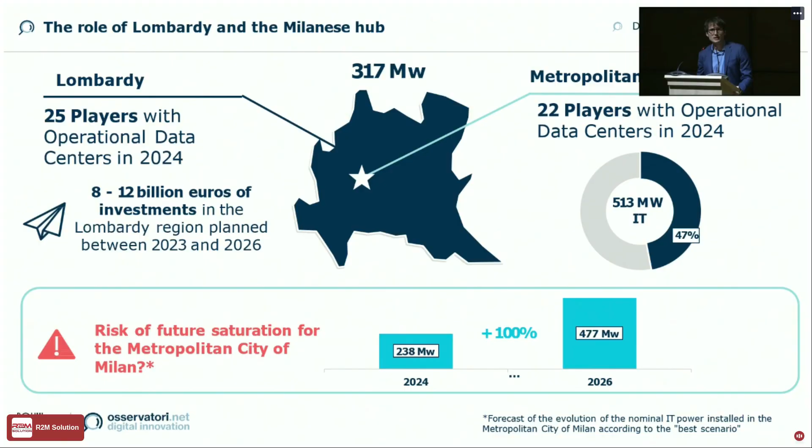In Lombardy, we estimate that we collected from 8 to 12 billion euros in the 4 years from 23 to 26, and now we have about 47% of all the data centers in Italy. We expect to double the amount of data centers in just 2 years, because by the end of 26 we expect to reach 480 megawatts installed.

It's a very good moment for the development of the market, and to play an important role not just for Italy but for the European market in general, because the European market was usually developed in the 5 most important markets, the FLAPD markets. But in the last couple of years they've had a slowdown in investment development. This situation creates an opportunity for the Nordic countries, also due to the climate conditions, since it's easier to manage temperature issues connected to data centers, but also for the South European markets like Spain, and of course Italy.

So it's very important to create a good environment for investment, because we could play a role as one of the most important computing centers, not just for our country but for the whole European market. So I think I've given you a little overview of this market. I hope it was interesting.

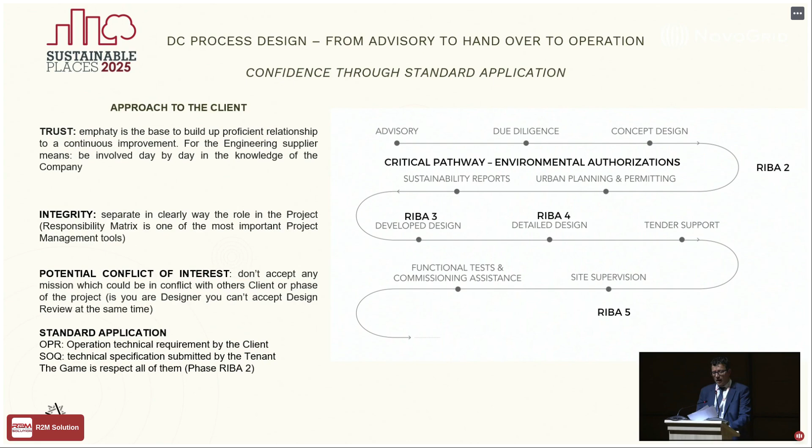So if we wanted to go through this conversation, the critical points start from a different system to measure the key factors in a data center that are totally different from logistics. Logistics measure the efficiency on the square meters, and also the value of the asset, of the land, is measured on that. But it's not the same for data center.

Data centers have as a fundamental key point how many megawatts can deliver for IT, and the capability for the asset to receive the electricity power. So when you are doing a test fit, in all the process that you have to follow during the due diligence, the first request is how many megawatts we can deliver in the asset.

What is one of the most important key points for efficiency is the PUE. The PUE is a very simple indicator that measures the total facility power on the IT equipment power. That means that if 100% is the need for IT, a PUE of 1.5 means that you need 50% more to ensure the operation of a data center.

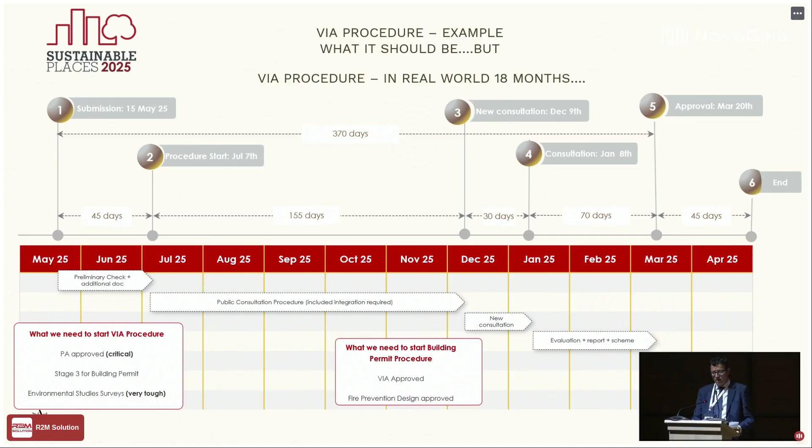Take only 2 minutes about the design process and the learning curve that we have during the design phase. Usually for DC field, we use the RIBA process. This is a protocol defined by an English institution, and they develop the RIBA in 7 different stages.

But what we need to focus our discussion on is only the first 5. This slide means the first stage is related to the advisory, and usually we take the RIBA till RIBA 1. At the end of RIBA 1, we have a test fit, which is an exercise that tries to fix in a geometrical way the capability of the plot, but it's not already investigated for the next stage. That means environmental, for example.

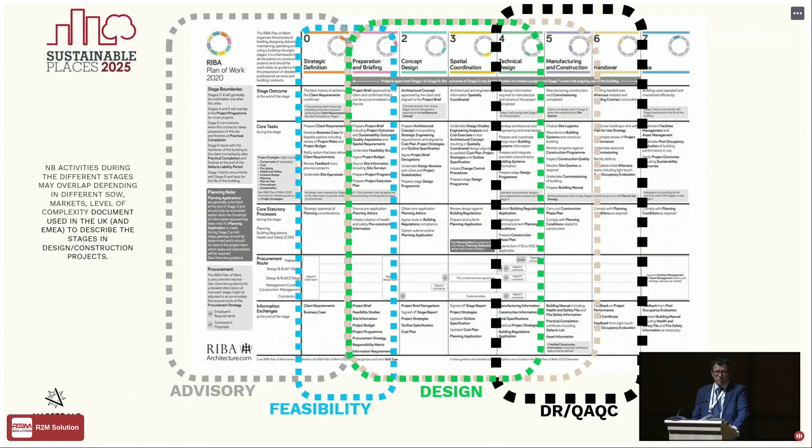The critical point is totally on the second stage, where you have to totally complete your survey. You have to be sure that you can go on and proceed on the building permit. Then, after the third stage, which is usually our definitive stage in the Italian protocol, we can launch the building permit application and also investigate the market with the contractor, not in a tendering definitive way, because we need stage 4, but we can collect all the offers.

This slide can give you an example of the learning curve. I only wanted to put a curiosity to all of you. Usually in Italian, when you talk about maintenance, it's something we put on the right side at the end, as a weight. It's totally different for DC. The plant replacement strategy is one of the most important parts of the total design process, and we need to implement it in stage 2. If it's not possible to remove something from the plot, as for example a transformer or genset, it's not correct to go on with the project.

What happens after the design phase? The engineering company can also be involved in QA/QC and design review. These are two different things. Design review is when the client asks a third party to go deep into the project and try to identify room for value engineering. And QA/QC is instead a process of quality and control.

Usually when you play in other countries, you don't have the clerk of works, but for example in Switzerland, you do, and you need a QA/QC. This is the point I described to you before about the potential situation where integrity of the professional is needed, because QA/QC and design review are not possible to cover with the people who developed the engineering.

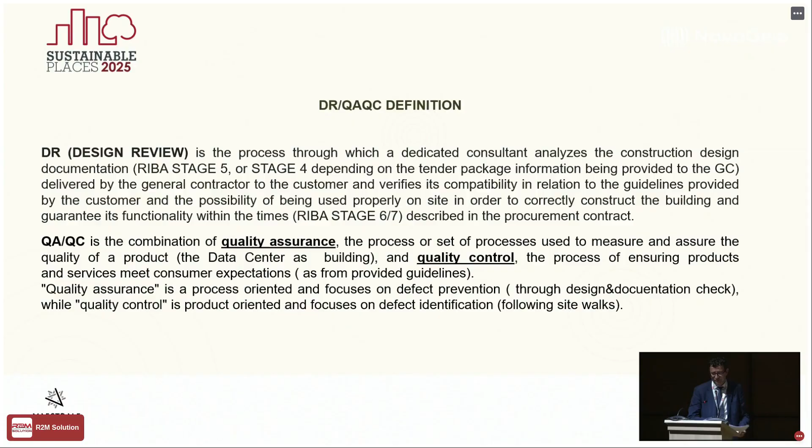Thank you, Gianluca, thank you so much for showing us. Maybe there were some additional slides in the deck, but I think it was a very good introduction and anticipation for the next speaker and topic we'll address now. You mentioned that data centers are not logistics, but also introduced the idea that there are many different stakeholders involved in this long life cycle. So Mattia Mariani will now tell us more about key performance indicators and the different stakeholders and what interests they bring into data centers.

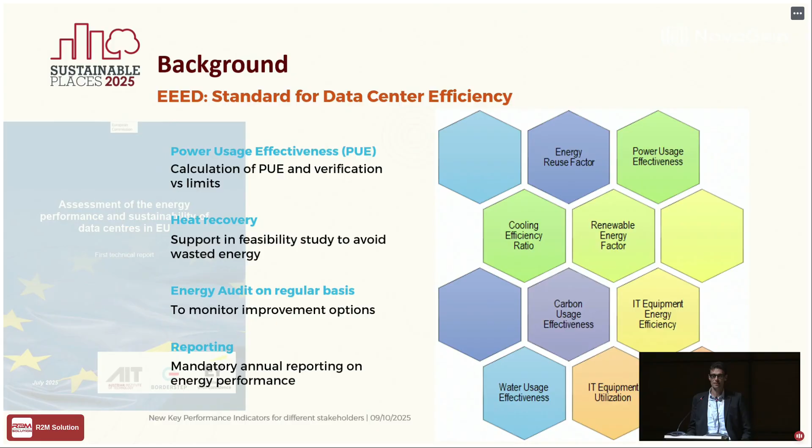Just in the picture, on the left side, you can see the first report of data collected by the European Union about data centers. It's something you can access from the web, and you can find some interesting results about the data center market.

The other topic, which comes in a more local way, is the request we have as consultants in the data center market coming from the public authority. After an initial period where the data center was not really understood by the municipality or the Italian authority, we now have in Italy also some indications from them.

When you present documentation, for example the VIA or AIA documentation, you receive some comments. I don't want to tell you a lot about the administrative process, since that's not my area - my background is on sustainability, so it's not my preferred topic. But I take from this process the requirements, and there is something interesting.

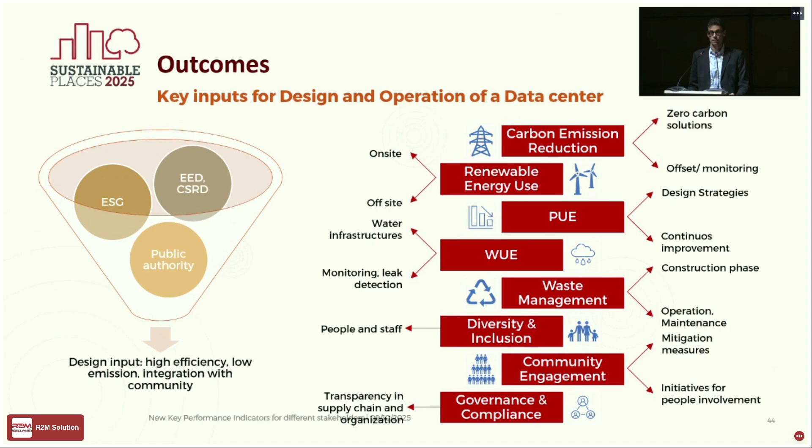So having communication and transparency in the data center is really, really important for the sustainability of the data center.

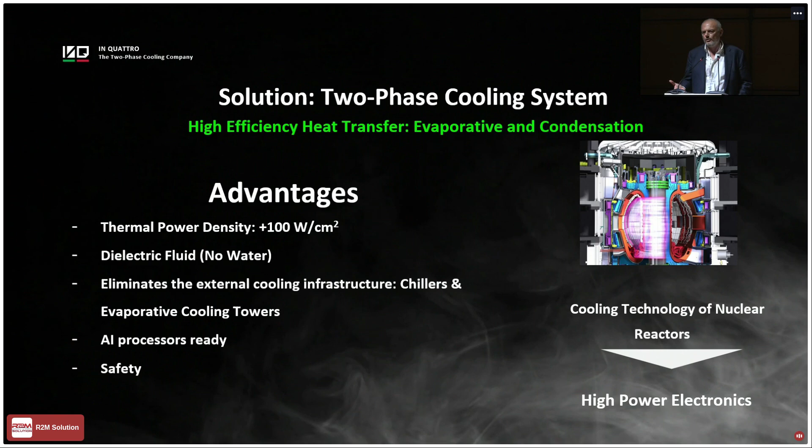So these are the main advantages of this technology. What is the origin of this technology? We didn't invent anything actually. This technology has been developed over the last 60, 70 years for nuclear reactors, but of course at large dimensions, large geometries. What has been done during the last 30 years of research around the world is to reduce the dimension of these systems down to the size of electronic components in order to cool them. These components are generally related to high power electronics.

So what is possible to do with this technology? The PUE, power usage effectiveness, can be reduced from a range of 1.5 to 2.5 for a traditional cooling system—this depends on the technology used in the data center and the quality of the cooling system—down to a theoretical limit of 1.05, typically between 1.05 and 1.2. This range depends strongly on the configuration of the data center.

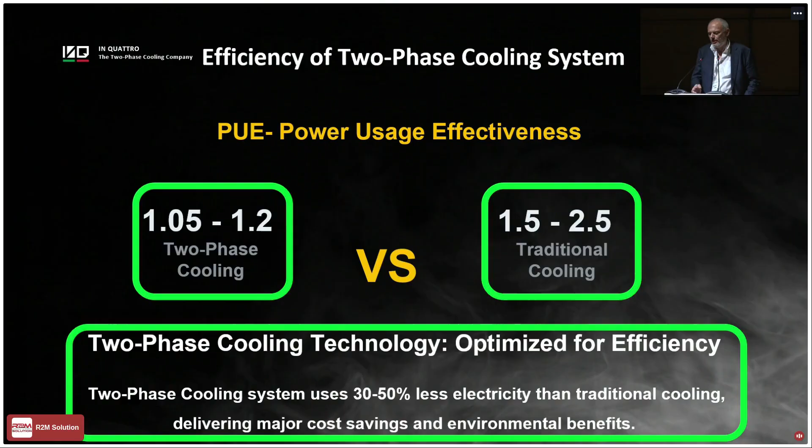Just to give you an idea, if you put an external heat exchanger called a dry cooler—a system that is not a chiller and doesn't use water—you release the heat generated in the processor outside with this system. If you place this at 30 meters distance from the data center, the PUE is about 1.07. This shows how important the design and configuration of the data center are for this particular KPI. With two-phase cooling systems, it's possible to reduce electricity consumption compared to standard cooling technologies by between 30 and 50%.

The other important parameter is water usage effectiveness. As I told you, it's possible to reduce this to zero with two-phase cooling. We have here a comparison of this parameter with other technologies. I should note this comparison is not easy to do, because it's not easy to calculate exactly the water consumption—not only the water consumption of the data center itself, but you also have to consider the water consumption for generating the electrical power for the data center.

So it's a very complex calculation. In any case, it's possible to reduce this down to zero, because with this technology it's possible to cool the GPUs and the CPUs with external temperatures of 45 Celsius degrees.

This is an important limit. Normally, with liquid cooling, you can cool the data center with an external temperature of about 35 Celsius degrees. If this temperature is higher, then you need to use evaporative cooling towers, and these components are the ones that consume water. Evaporative means that water is used to reduce the external temperature of air from 45 Celsius degrees down to 35 Celsius degrees.

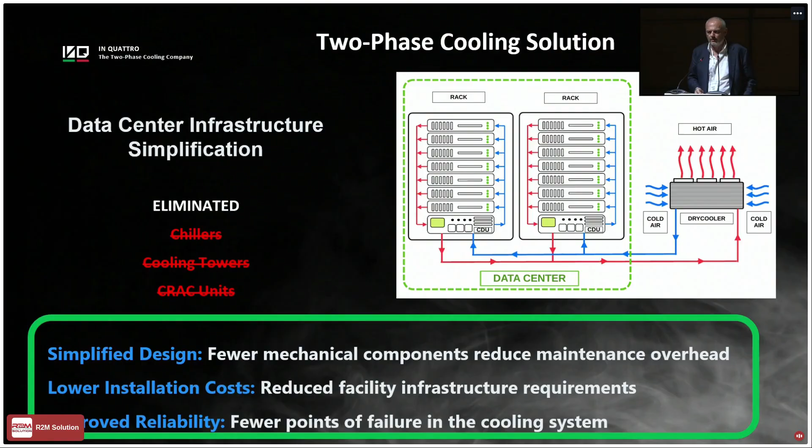We also use aluminum as a material and not copper. This decreases the cost and also the mass of the system. It also reduces the cost of manufacturing, because aluminum is much easier to work with.

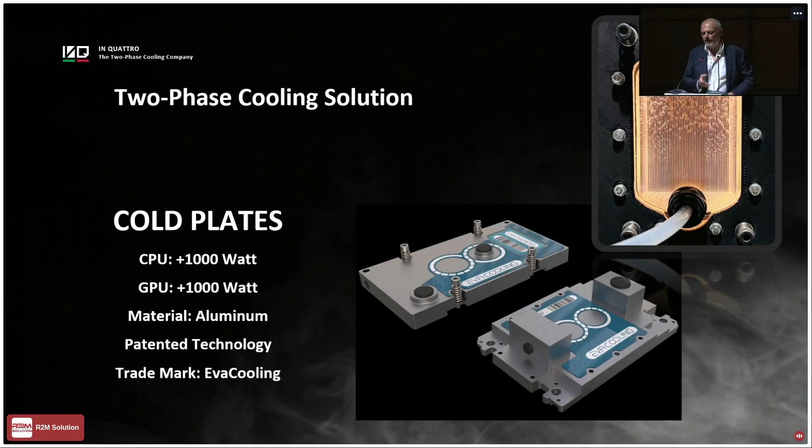And you can see the evaporation that occurs inside. These are the other components of the two-phase cooling system, and these components are quite standard. There is a CDU, a coolant distribution unit, and a manifold that distributes and collects the fluids in the servers.

And yes, it's possible - we develop these cold plates for this family of processors: Xeon, NVIDIA GPU H100 and GB200. And we expect to deliver our solution in January next year.

So who we are? In Quattro is, as I told you, a startup, an Italian startup. Actually, it's a spin-off of Enea. Enea is one of the largest research centers in Italy. The co-founders are researchers of Enea, and we developed this technology over the last 20, 25 years for space applications with a European Space Agency funded project.

So at the beginning, we developed this technology for space, and we performed several parabolic flights and tested this technology in microgravity and hypergravity conditions. And a few years ago, we had the crazy idea to create this company, with the idea to use this technology also for terrestrial applications.

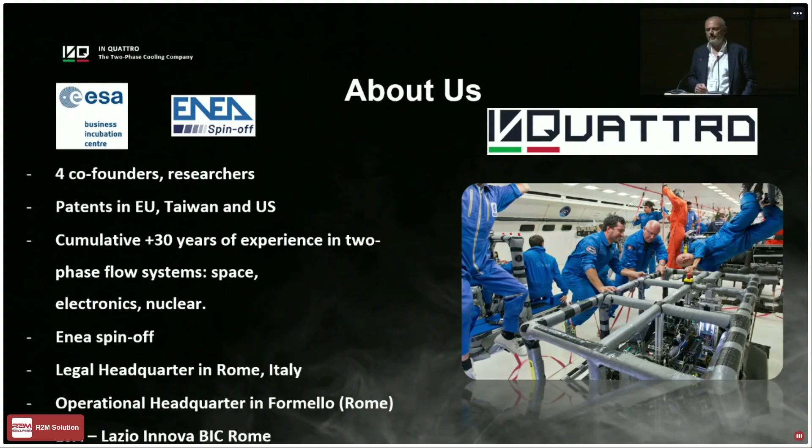So this is the team. At the moment, we are about 12 people, and in the future we are raising a funding round, so we will increase this number of people.

Thank you for your attention, and I just want to mention that In Quattro is the company, and sometimes you can see EvaCooling — EvaCooling is our trademark for our technology. So thank you.

Thank you so much, a very interesting journey into energy optimization. Congratulations also for this interesting company and for bringing up the evidence that there is transferability across technical domains — really interdisciplinarity can help advance sustainability in the sector.

And now Alessandro Piccinini will tell us something about the applications of digital twins to support decarbonization. Thanks. Thank you for the introduction.

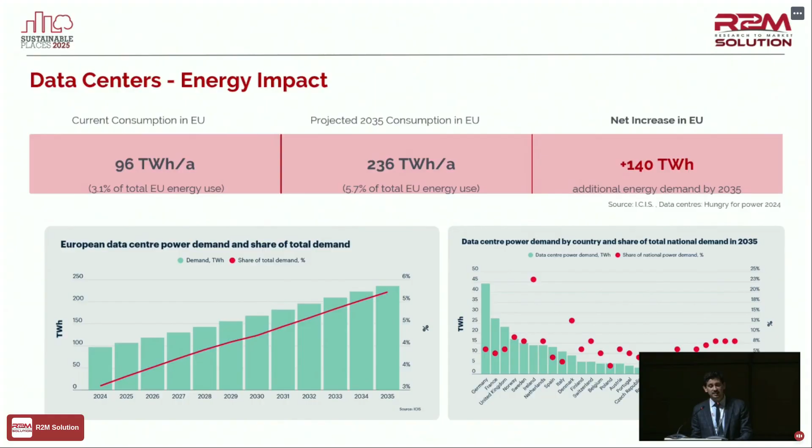Good afternoon everyone. Before starting with the presentation of the R2M digital twin solution to support decarbonization processes, I prepared a quick introduction regarding the energy impact of data centers in the coming years. Currently, data centers are consuming around 96 terawatt-hours per year, and by 2035 it's expected to increase by 140 terawatt-hours. This is a huge increase.

But since it's always difficult to understand these big numbers, I prepared a comparison with the new EPBD4 challenge — one of the main arguments that R2M addresses. Basically, the new EPBD gives some targets for residential and non-residential buildings. For non-residential buildings we have two main targets: one for 2030, with the main scope to renovate 16% of the worst performing buildings, and a second target, also around 2033, to renovate 26% of the worst performing buildings.

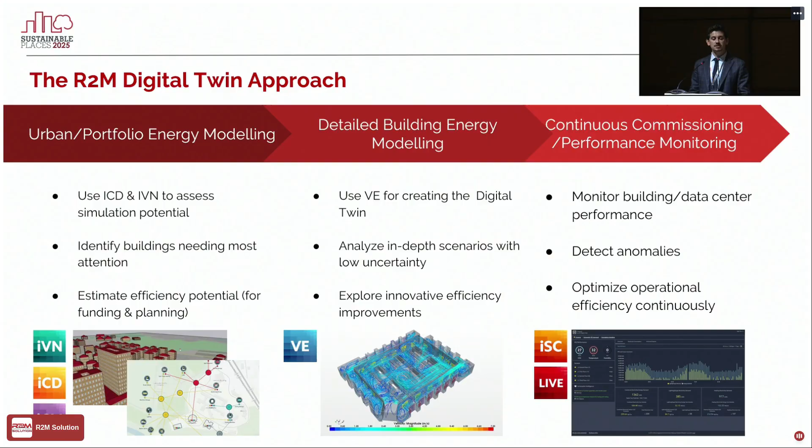And finally, a new path is continuous commissioning and performance monitoring. Here the scope is to utilize the detailed model to detect anomalies in the real building — so to do monitoring, but not just monitoring, also reusing the detailed energy model to assess and perform fault detection and diagnosis in buildings and data centers.

So with this scope, in order to present our digital twin approach, I'm going to present a series of case studies, hoping they'll be interesting.

And just to mention, from the grid, we were able also to recover some of the waste heat from a data center. And thanks to the recovery of this heat, we were able to have a very good return of investment from the district heating and cooling grid.

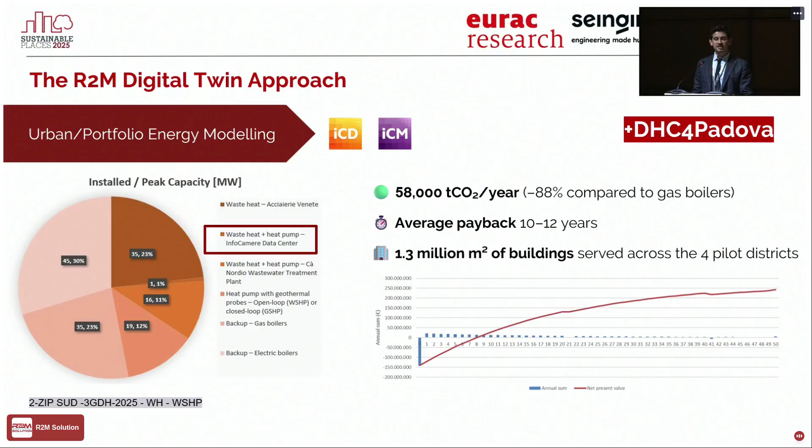So it's very important to do this kind of urban level analysis to understand how much we can recover from this data center and how much we can give to the buildings in order to improve the efficiency of the data center, but also to improve the efficiency of the buildings that are near the main cities in Europe. So this is another point of view with the model we did at urban level.

What we can also do is an EPBD analysis in which we can underline which buildings at urban level need to be renovated under the new EPBD.

So then the second level of detail is the detailed building energy modeling. In this case, the scope is not to model the whole municipality or district, but to model the single building. Here I'm presenting a small data center, but a real data center, of the European Space Agency in Madrid, where we helped the design team to improve the efficiency of the building by providing innovative solutions in the data center area.

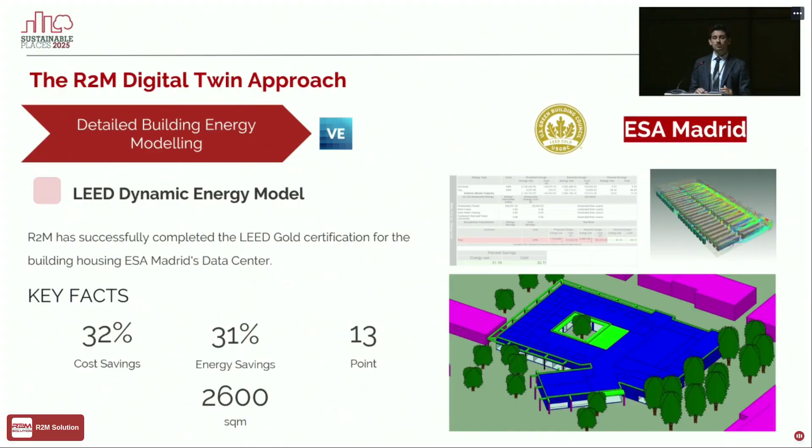And thanks to this innovative solution, we were able to reduce consumption by 31% compared to the baseline building of LEED, and we got the gold certification. So the scope of this work was not just to get the LEED plaque, but to follow the design team in reaching the best energy efficiency for the building.

Another case study, this one from the IES team, again made with IES, the detailed energy modeling software. In this case, the scope was to study the ventilation system of the Central Bank of Oman data center. Here you can see we utilized CFD analysis and did detailed study of the ventilation in order to improve the ventilation system inside the data center.

So the only problem right now with these detailed models in general is that basically, after this kind of analysis, they are usually not used. They go in a bin. So the scope of these two platforms, iSCan and IES Live, is to reuse this kind of model.

For doing anomaly detection, fault detection and diagnosis, for monitoring. So what we do here is use the platform IES Live, in which we can monitor all the performances of the data center. But what we can also do is compare the performances of the data center with the digital twin that we made with IES. And by comparing the real consumption with the simulated consumption, we can detect anomalies, we can simulate energy efficiency scenarios and things like that.

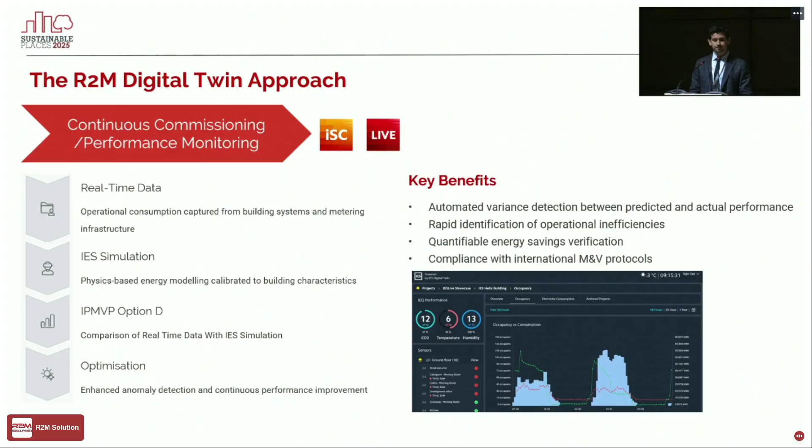So last thing, the slide is a bit crazy, but this is a new application we are creating to give our experience to everybody. Basically, we are creating this new application. It is in a proof of concept phase. This application can be used by anyone who can put in information regarding the building.

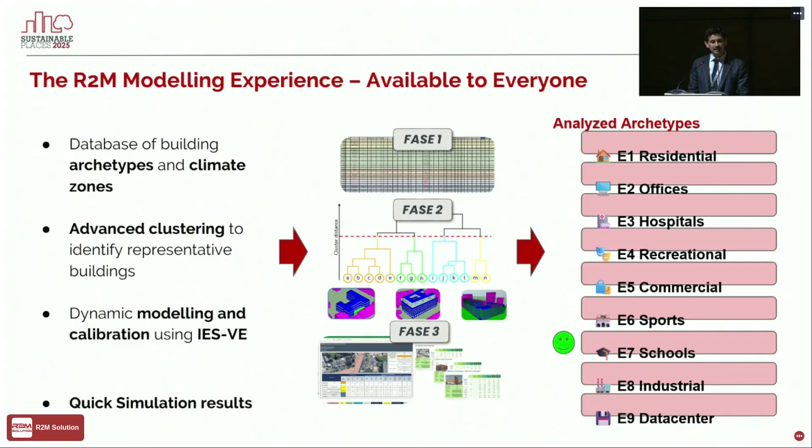The scope is to have different archetypes, and one of the archetypes will be data center. We already did a proof of concept for schools, and it worked well. I will present the case study later. Basically here, this application will be a web application in which the user can insert some data regarding the building, and automatically the application will estimate the missing data regarding the building.

And thanks to our experience in terms of energy modeling, we created an algorithm that will be able to assign this building to an archetype and to an energy model. Thanks to this methodology, we will be able to estimate the result of efficiency scenarios in different types of buildings. So here, just to present a case study that we already tested some months ago.

So basically, we utilized this technology for 100 schools in an Italian region. We applied this methodology, and in a few weeks, we were able to estimate for each school different KPIs regarding energy efficiency, different energy efficiency scenarios, and economical KPIs like the cost of the retrofit, return of investment, payback period, capex, and so on, with an average error compared to a standard simplified methodology of around 10%.

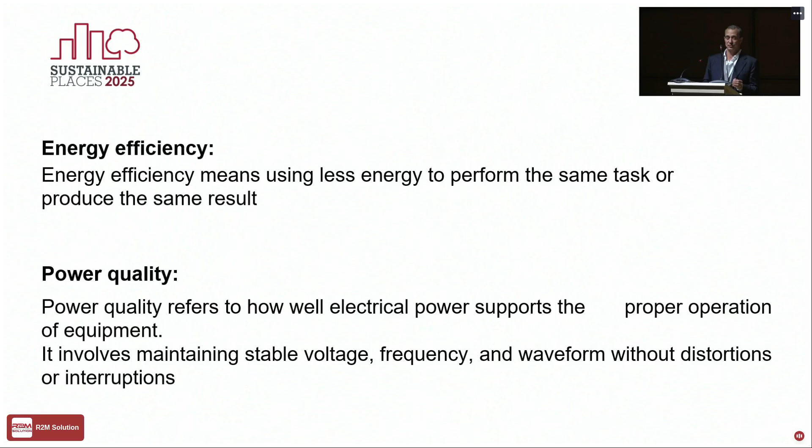Second definition, power quality. When we talk about energy, we have to think that energy is very similar to water. They do things in the same way. The only big difference between water and energy is that water you can touch, you can see it leaking on the floor or from the ceiling. When there is a leak of energy, you don't touch it, you don't feel it. So it's an invisible problem. Power quality refers to the flow of electrical power supporting proper operation, but the problems are connected to stable voltage, frequency, waveform, distortion, and interruptions. Interruption is one of the main topics of this speech.

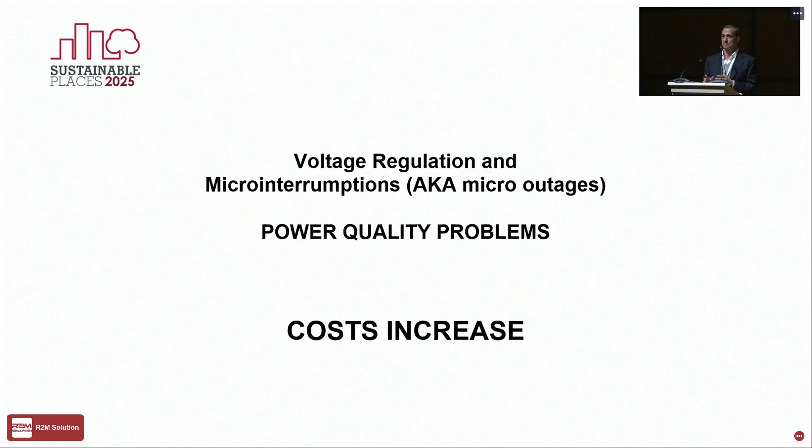So I give you a cool picture. Okay, so voltage regulation and micro interruptions, also micro outages, are problems connected to power quality. And the result of this is cost increase. Due to these problems, companies, industries, data centers, everybody has a huge increase of cost. Because most of these problems are not due to the building, to the property, to the company, the factory, they are due to the grid. But why?

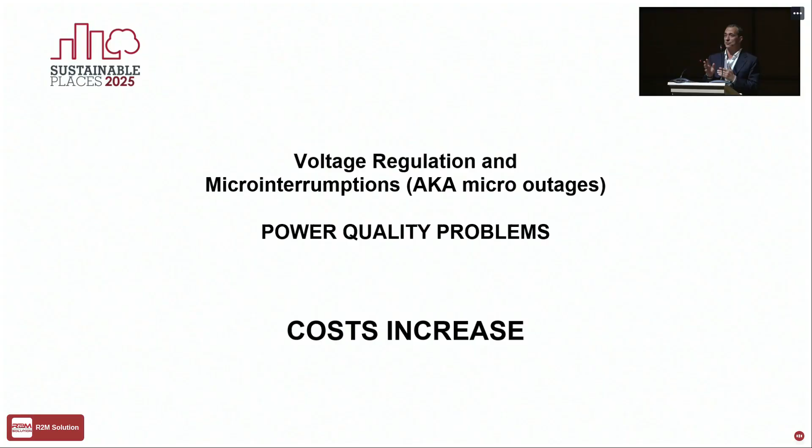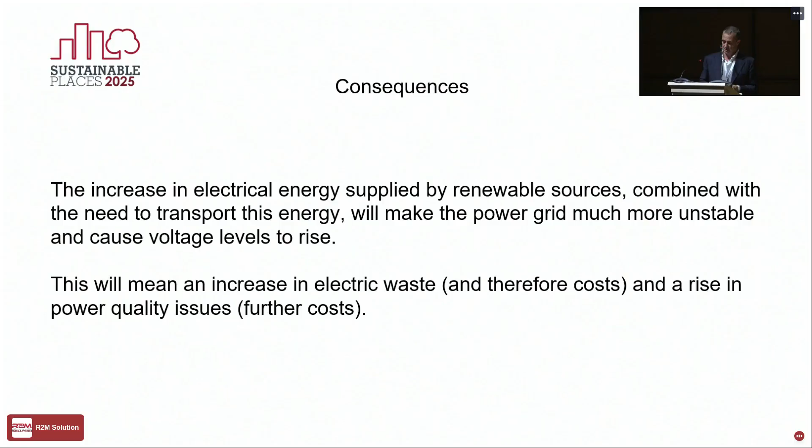So what are the solutions? I am not going into technical aspects because it's not the right place to do it, but the consequences are these: the increase of costs for any company. Cost isn't just about paying more for energy, but paying to solve these problems, paying to protect my company from these problems. The first one is voltage optimization.

Very quickly, the grid gives you a theoretical 400 volts in low tension power. But you must think: what do you do if you switch on all the plants, everything in your company? You must be ready to have enough tension to make everything work. If you open all the taps in your flat, you must have enough pressure to use all the taps - 3 showers, your wife, your son, whatever.

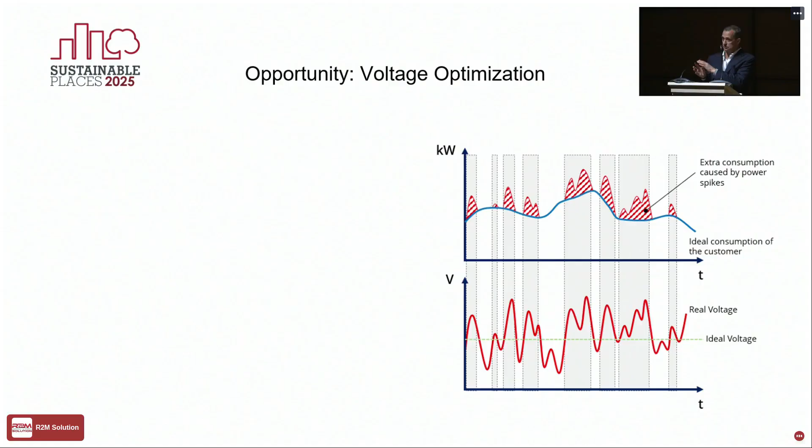All this extra tension becomes heat, becomes something that you don't feel, you don't use, you throw it away - it's transformed into the effect of Joule. So all this energy that is thrown away is paid by the consumer.

So there is a technology called voltage optimizers that can give a reduction in electricity consumption between 4 and 6%. Just, to make it very easy, by filtering and keeping all the extra tension inside and using it. So you do the same work using less energy - what we called at the beginning, energy efficiency. This is the solution for voltage.

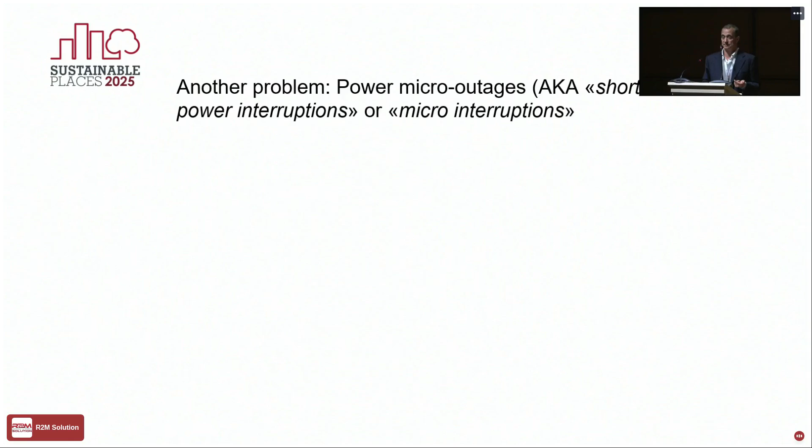Micro outages are interruptions, usually less than 1 second, that you might say, oh it's just the light flickering or something like this. But especially for modern plants, it's a huge problem, because modern plants have a protective system that, if there is a leak of energy, says oh no, something's going wrong, I stop everything before everything is gone. That means you have to stop the plant.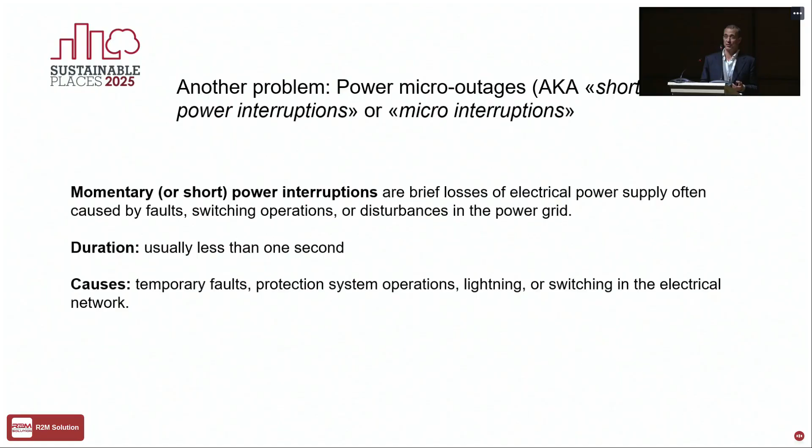This problem can cause an incredible amount of money and troubles. I decided to give you an example of a company. I chose a company of a completely different field. There is another example of a company that makes microprocessors close to Agrate, but I don't want to talk about it - but I can tell you that every micro interruption costs them 300,000 euros. This company makes tomatoes. They work tomatoes, they make salsa - they're specialized in tomato processing.

They used to have more than 5 micro outages per day. That means that every time there is a production downtime, they have to throw all the tomatoes away - already boiled, chopped, sterilized - because the process of sterilization is gone, so the product is not safe anymore. Try to imagine that all what you have done, all your job, is thrown away because of micro outages that last 0.5 milliseconds. For them, it was a problem of thousands and thousands of euros every day.

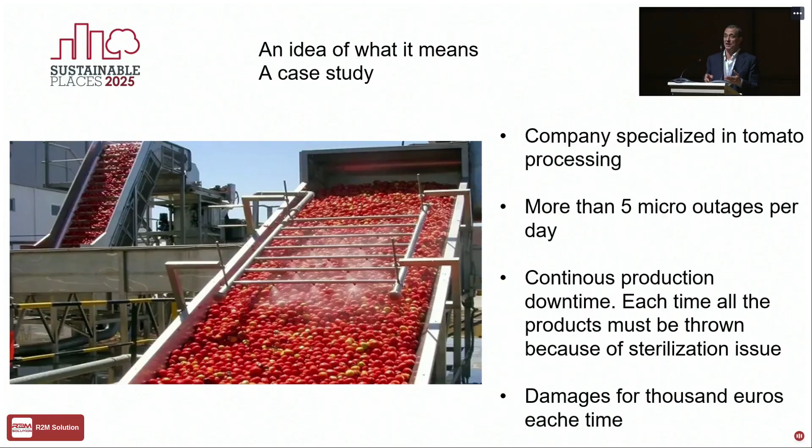So they were considering moving the plant completely to another place. Because of course you can complain to the supplier, you can say give me back the money, whatever. But if you have to provide the sauce to Barilla or to Cirio or whatever, and you don't provide the product, it's not a matter of money - it's much more.

The solution to this kind of problem is the micro outages compensator. Without going too deep into this device, what does it do? It works by giving energy that, let's say, makes the outages flat - it stays all the time waiting, hidden. When there is a problem, it comes out and says, okay, you need energy for, say, 0.3 seconds - here is the energy. This gives continuity, the opportunity to keep working without problems.

So, final consideration: the problem is now, as I said, as big as an ant, but it will be bigger and bigger in the future. And it will very deeply involve all the investment, the ROI, the business plan of the companies. The good news is that there are solutions. The market will develop more solutions in the future because we will have more problems.

This technology has been on the market for 20 years, 15 years. The problems are happening now because the cost of energy is huge, because the consumption of energy is huge, and because the problems are growing year by year.

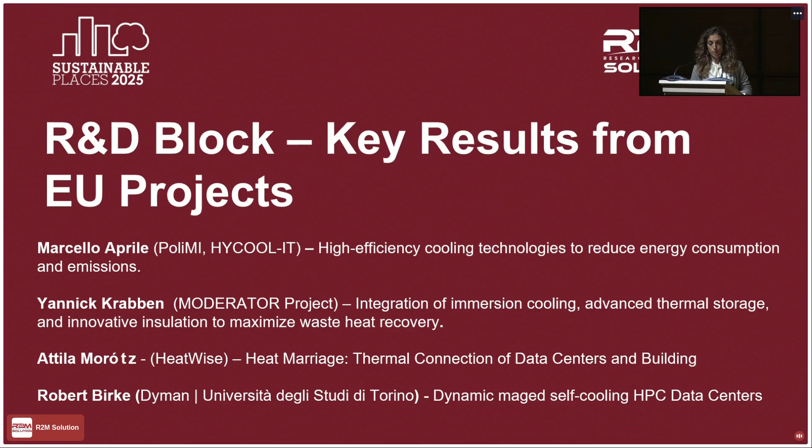Good evening, thank you Chiara for the introduction. My role here is to showcase some preliminary results of the HYCOOL-IT project. We focus on small data centers, such as the ones we have in universities and hospitals - the tertiary sector. The main reason is that there are many of such data centers in the EU.

We talk about, on average, 25 racks per small data center, but with the increase of power capacity of racks, even 25 can really turn into a huge demand of electricity, and therefore efficiency is a concern. Since they are linked to buildings, the opportunity to recover waste heat into the building is clearly a possibility that has to be explored, and so far this is not common at all.

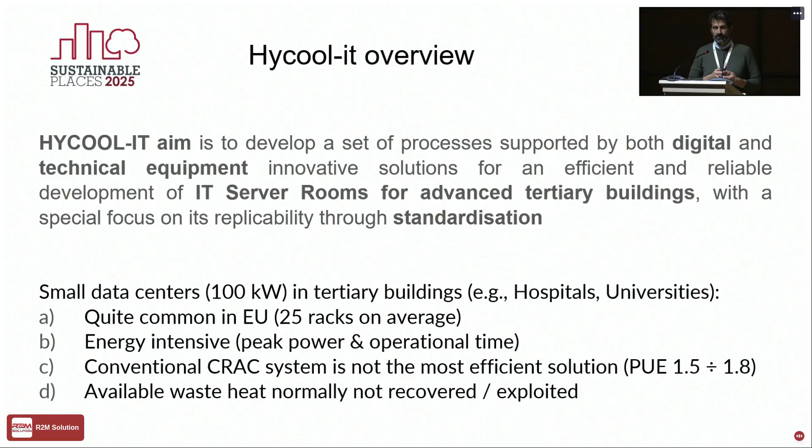These are the two main strategic goals of our project: a building digital twin in which we cover not only the data center but also the building together, and potentially the waste heat recovery system, and the methodology we use to build this solution, which I will explain later on briefly.

The second strategic goal is the development of a new cooling system that can be integrated into the rack and that can leverage the heat produced by servers to produce some cooling that can be locally used, providing a compact way to cool servers and at the same time cool the room and other devices that are normally air-cooled in server rooms.

Also, this solution can provide waste heat at temperatures which are of interest for integration into perhaps district heating networks, not just the building itself.

The interesting part of the project, besides developing this solution, is that we want to validate them for real. So we have a demo system in Milan at Politecnico, and we will test the solution both in the laboratory and in a real scenario.

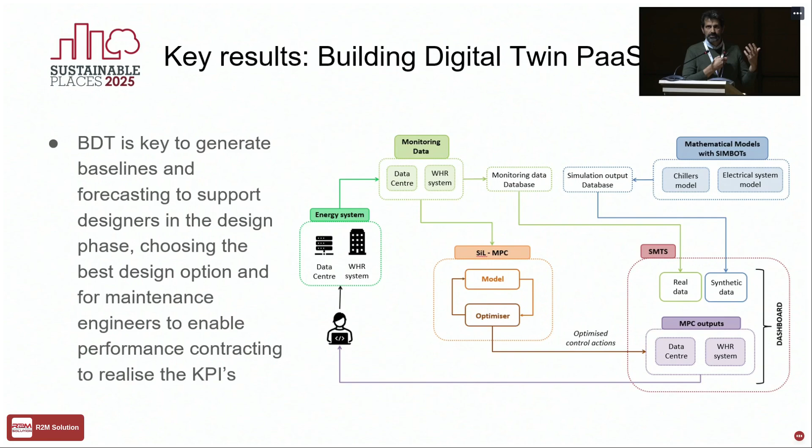What is not maybe evident is the huge effort and cost necessary in creating the mathematical models for the energy operation of all the different parts that constitute a server room, the cooling plant, and the building itself. We would like to do that in a standardized manner that can be replicated and used in different simulation platforms with ease. This is one of the main objectives, not just doing the digital twin, but doing it in a way that makes sense for the future.

Now I have to switch quickly to the second strategic goal, the development of a new cooling system conceived to be integrated into a rack. The idea is to exploit the heat at relatively high temperatures generated by servers to drive an adsorption cycle, generating cooling that can be used to cool other devices in the rack which normally do not require direct cooling like liquid or two-phase cooling, because the capacity density is not that high. So this is a compact machine that can be integrated into the rack.

Here you see a first proof of concept of a machine that can provide a power usage effectiveness of 1.1. The main innovation is in the shape and the way it is implemented, in order to achieve that level of compactness. And then we should not forget the waste heat that is produced in the end.

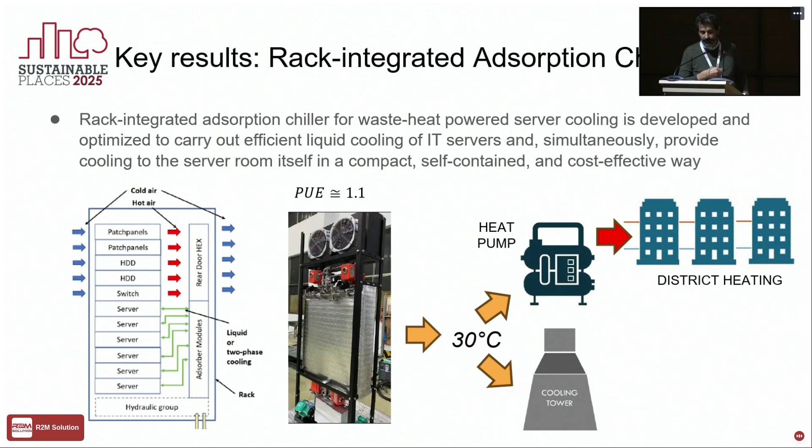That's all for this short presentation. I leave you the contact details, and if you want to follow us on the internet, we are just halfway, and we hope to reach some interesting results to share with everyone. Thank you.

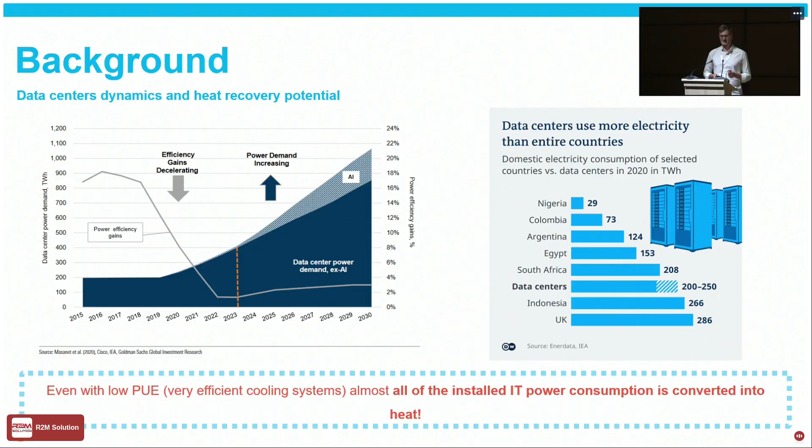But first I will go a little bit into a broader overview. As many of you know from the sessions before the break, the power demand, or the energy required to operate data centers, is projected to increase quite a lot. As a comparison, I brought a different metric that you already saw in the morning. The sum of all the energy required for data centers is comparable to the energy consumption of whole countries. So it's a huge amount.

And we're able now to reduce the PUE quite a lot, and I think we'll hear more in the Dyman project about how to get PUE close to 1. But in the end, all of the energy that you put into the system will be dissipated as heat at some point. And why not use that huge potential for something else?

This is exactly what the Moderator project is focusing on. So our focus is really this waste heat recovery system, and we are doing that in different steps. Our main focus at the beginning is the development of an immersion cooling system, a system where the data racks are fully immersed in a dielectric fluid.

We do numerical system simulations, where the goal is really to get the dielectric fluid to the highest temperature possible, to then gain as much as possible for a secondary use. Then we're also focusing on the development of a storage unit to bridge this intermittent availability between the energy provider, so the immersion cooling unit, and the secondary use.

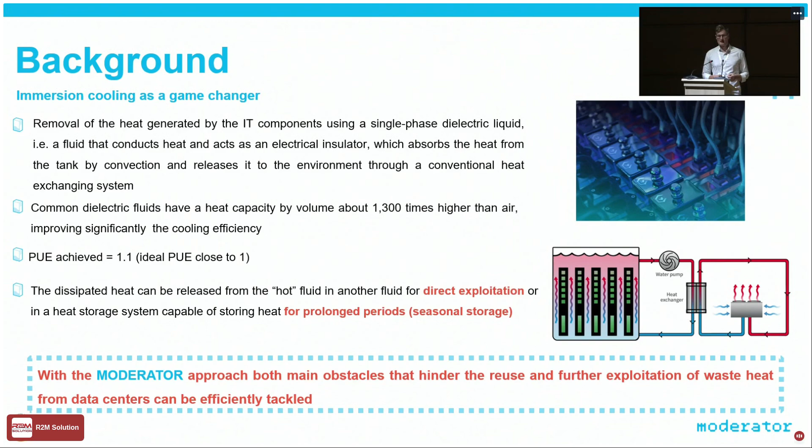Within the project, what are we really optimizing? First, as said before, we're looking at this immersion cooling unit to reach the highest temperature possible. We developed three phase change materials that will be used to take the heat from the immersion cooling unit, store it, and make it available for a secondary use, which we'll look into a little deeper after.

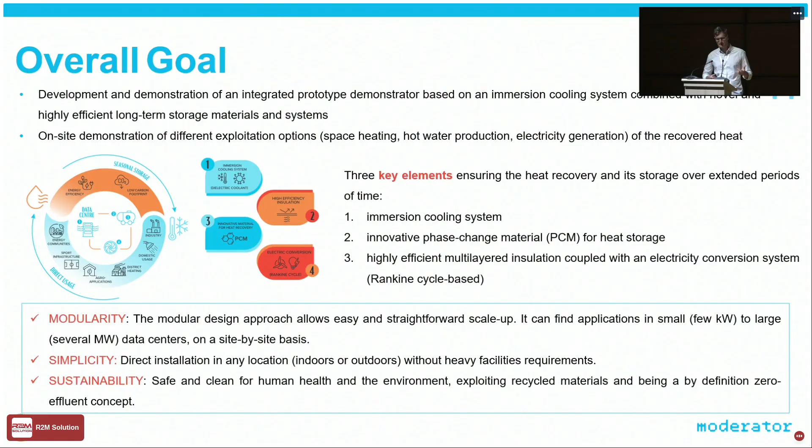The last thing is this highly efficient multi-layered insulation material, where there's also a circularity aspect. So we look into insulation materials that are produced from waste, namely, for example, expanded glass spheres from PV panels and so on.

Then one of our main goals is to have a certain amount of scalability, so the system should be really modular. The immersion cooling unit we're designing is 40 kilowatts, and the storage unit is also dimensioned to fit this 40 kilowatts. So from these 40 kilowatts, we can scale the system to any size we want. This is really one of the main focuses of the project.

Then what we're working on a lot right now is looking into different case studies. So not only the supply side, but also checking geographically where a new data center should be placed, dimensioning the storage system, and then what applications we can deliver the heat to. Of course, the classic ones are shown here: office buildings and residential buildings. Then, for example, low temperature industry use, or we've also already looked into agriculture systems.

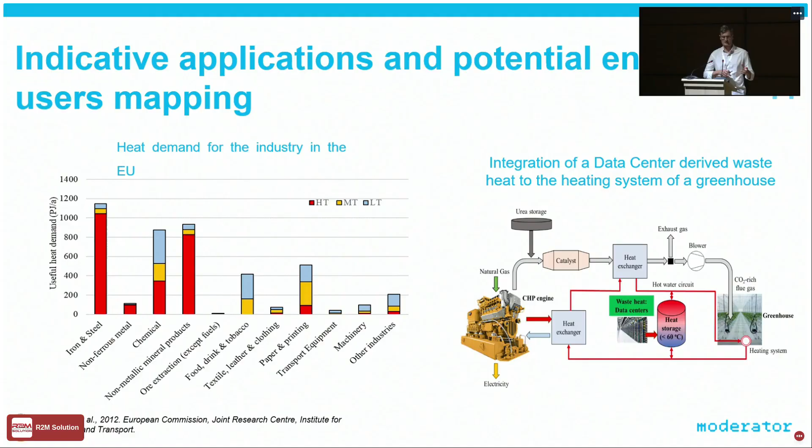This just shows another possibility. As I said, we're currently looking at different industrial sectors. We even already looked into different fish farms, for example, where you could use the heat. We have a case study in Norway, because there you need a lot of low temperature heat to keep the water temperature at a certain level. Then, of course, greenhouses are always a topic, and just general investigation into where we can reuse the heat that is stored, looking at different case studies.

Then just quickly into the consortia.

We are 11 industry partners in this project, distributed all around Europe. With the first pilot that we're building in Greece, we are working together with Synapsecom. So they have already some data centers in use, and we'll apply our system design to a real case there.

Then we have partners like SINTEF, who do the whole simulation part, fluid simulation, to see how to really reach the temperatures within the immersion cooling unit. Gerosen and Opholite are working on the insulation material. We at HSLU, together with Cowa Thermal Solutions, are working on material development, and we already have a pilot plant in operation in a building district, providing heat for domestic hot water and floor heating for these buildings.

Then we have Highside Tech. They are developing the whole system integration, the interaction between each of the components, with quite a strong representation in Greece.

Thank you. Good afternoon to everyone. My name is Attila Moroc, I'm the project coordinator of the Heatwise project. I'm coming from Hungary, from H1 Systems, which is Hungary's leading data center designer, build and operator company.

We are an integrator. The whole idea of the Heatwise project came from us, and we are always looking for new solutions. I'm very happy to have colleagues here showing us in what direction they are developing the solutions. But what is our solution? That is what our project is about: we are going to connect data centers and buildings thermally. Data centers produce heat as a byproduct that has to be rejected, and buildings need heat all year long, for domestic hot water, heating, and so on.

Okay, I thought I was too loud. Good. We have 3 key indicators. PUE, you heard already what is PUE about - this is one of the most important, however often challenged, indicator of the data center industry. ERF, energy reuse factor, and primary energy saving.

So what does it mean, these 3 key objectives? This is world class - you've seen here the previous moderator, 1.1, which is already excellent. Now the average is 1.618 in Europe, but there are still data centers which have higher PUE. ERF of 95 means we are capturing almost all the heat that is generated. And of course PES of 20% means a massive CO2 reduction.

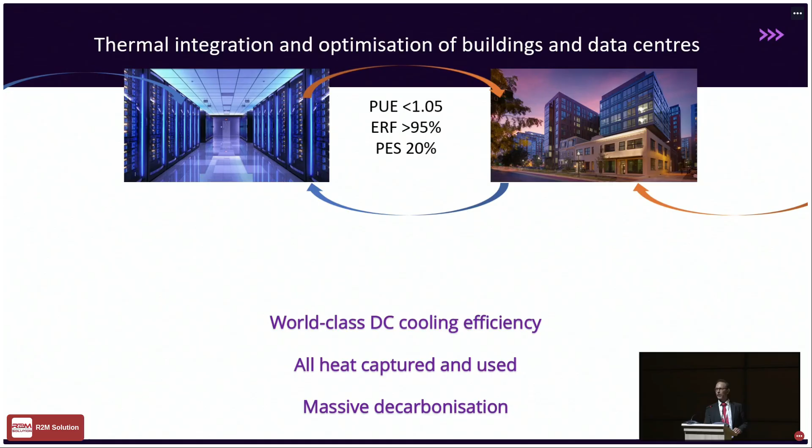When we talk about heat recovery and this heat reuse, then we are also talking about the first part, the 1. So practically 100% - well, maybe too much, 98% - of the electricity is converted into heat. So we are talking about both of these figures.

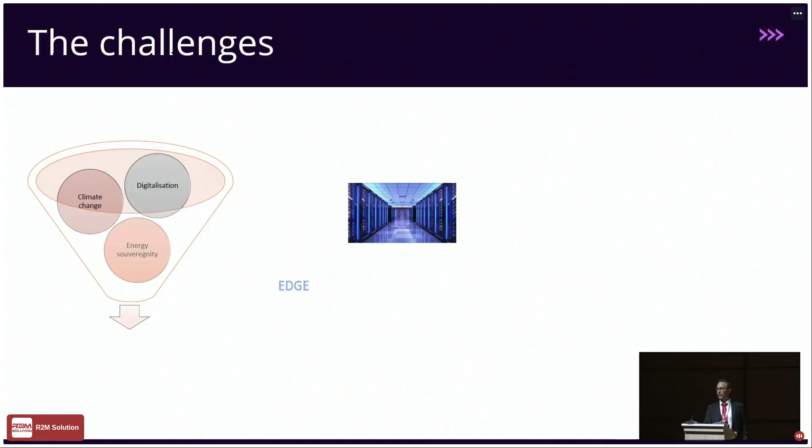So let's see further challenges. In the previous session there was already a lot of discussion about that, so I don't want to spend time here - latency, energy increase, EPBD, all kinds of cost and asset value issues with the buildings.

These determine how these entities are operated. Both are critical infrastructure - the data centers have to work 24/7, and the buildings provide shelter and comfort for equipment, for people. So these are two entities which are forced to live together. At least this is the idea of the research, and this is the idea of EPBD and EED.

But what is the problem? The problem is the cooling of the data centers and how it is happening. The mainstream is that 95% of the data centers are air-cooled, and air is a very bad energy transfer medium. So practically how it's currently done: 18, 25, maybe 32 degree cold air is blown onto the servers, and what comes out is around 25 to 35 degrees.

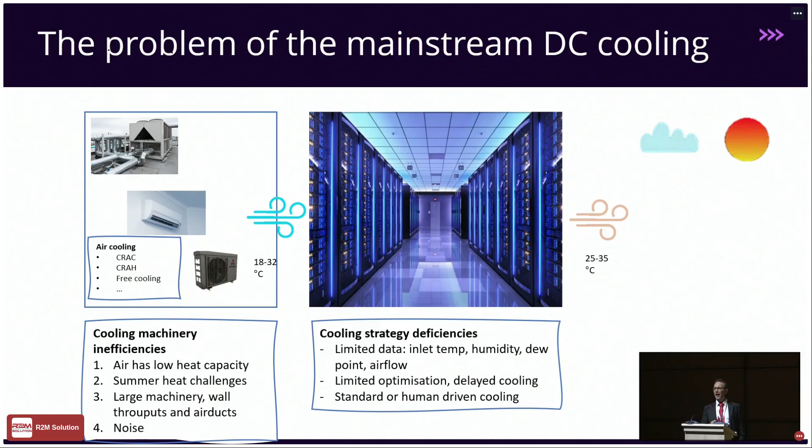And when you look at the building side, they are far from this range - especially if you're talking about not-modern buildings with low temperature heating, these temperature ranges are not really good. There is one more problem: how we are setting these temperatures, whether we are giving the right amount of cold. And no, we don't - sometimes the CPUs are overheated.

There is a delay in provision of cold, so thermal throttling is happening. What does thermal throttling mean? You put a lot of capex in your IT, and it is not working. Often the utilization rate, which was a KPI in the previous session, is maybe 60%. That's too low, your money is not working. So at the end of the day, practically you are wasting your money and wasting the energy that you produced, and it is also going into the air, into the environment, practically like litter.

And we thought we can do it better. We should not think of the current adjustment of the current way of cooling, focusing on the air temperature, because this is what the standards are saying. ASHRAE tells you what the humidity, what the airflow, what the temperature should be. If that is fine, that's fine, but it's not like that.

So we are focusing on the components. We want to know whether they feel good. We want to know what their temperature is. There is an optimum temperature or the maximum temperature where they can work, 70 degrees, 80, 90 degrees. So if we know what their temperature is, we know how much cooling to provide.

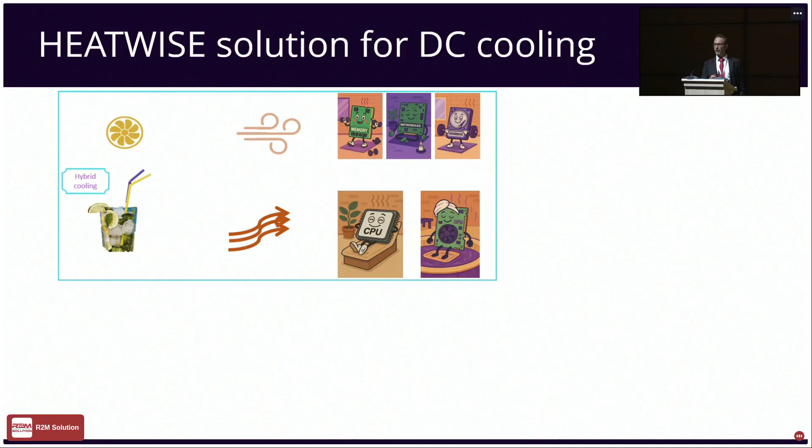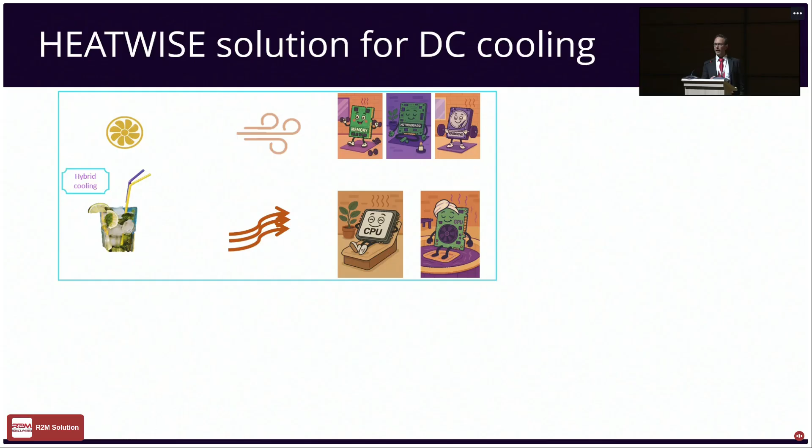So we provide air and we provide liquid cooling. You heard dielectric, remember from the previous session what it means? No water, absolutely harmless, phase changing. So the latent energy is also exploited, and we are giving it to the right component. We are giving liquid to the CPU and the GPU, and the rest gets air-cooled. In this way, we can achieve much higher temperature levels, and this is already useful for the vast majority of the buildings.

Key here, as I mentioned already, is data. Data in all stages of the cooling system: on the production side where it is absolutely needed, the consumption, and at the building. So everything is turning around data.

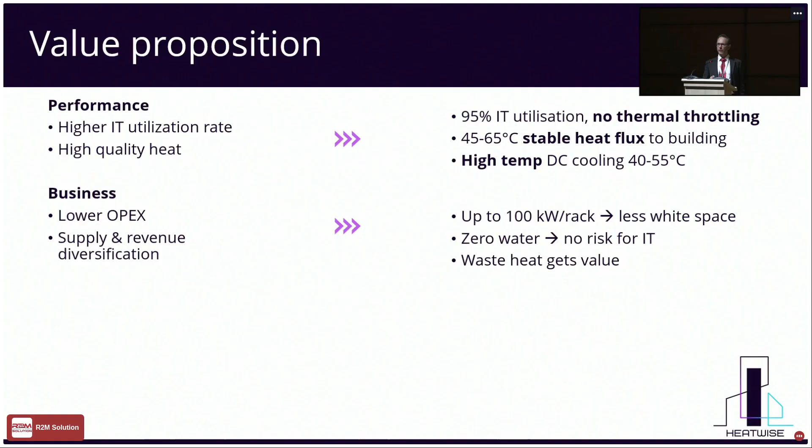And if we implement this solution, we have a pretty impressive proposal. This is the research about, we believe we can achieve 95% IT utilization, a stable and on-demand temperature, even reaching 65 degrees liquid to liquid, which means impressive business advantages in CapEx and OpEx. We believe we can achieve a lower CapEx, lower OpEx, an overall lower TCO, and we can fit in one rack something like 100 kilowatt of IT. The current is around 5, 8, 12, so it is a big jump.

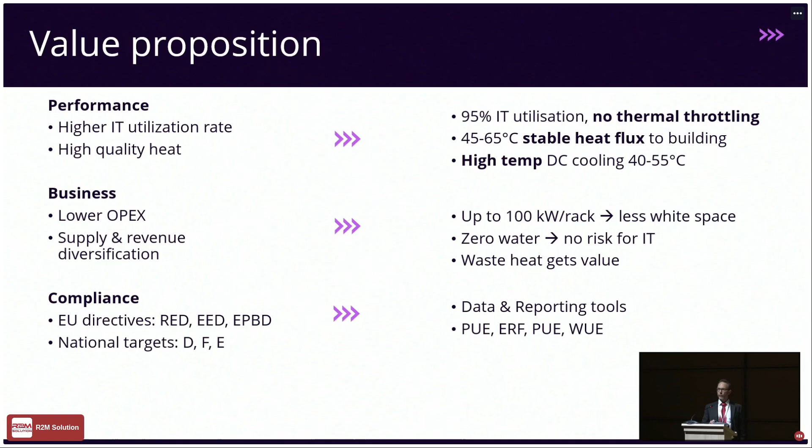We are developing tools that help with reporting, automatic reporting, and of course decarbonization. We are implementing this solution at 2 out of the 5 pilots, in Switzerland at EMPA, and at RISE in Sweden. We are half-time, still 1.5 years to go.

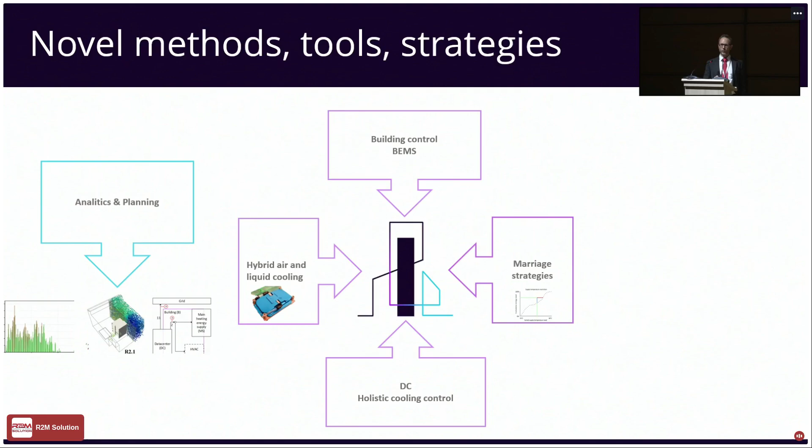Let's go quickly to the technical solution. We have several tools which we are developing. We have novelties in analytics and planning, looking at the building, what is the potential of waste heat. Then the data center and business case development is coming. So, analytics.

There is a new methodology that we developed, and new KPIs, how to assess the potential of buildings, how much waste heat they are able to absorb. We have some recommendations, very simple: find the low temperature systems in your building and connect your data center to them. We also developed a metering strategy.

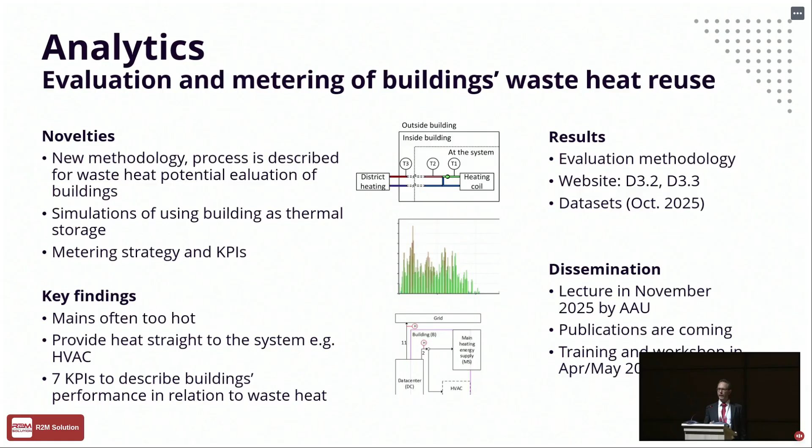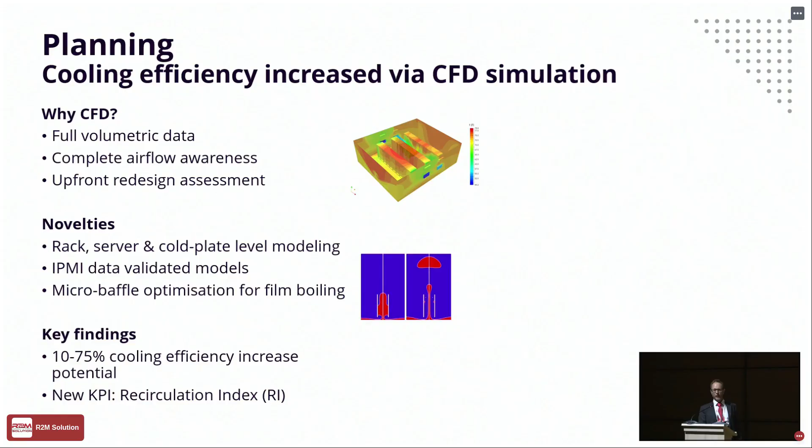If you want to learn more about this, I encourage you to participate in our November training held online by AAU University. For planning, CFD, we developed an open source based CFD tool, and before we touch any investment, we simulate what the effect of the investments will be on the various KPIs. I'm not going to tell you all, but we are able to simulate on rack level, on server level, and cold plate level. According to our simulations, it's possible to achieve with small edge data centers 75% efficiency without yet implementing our core solution, which is coming now.

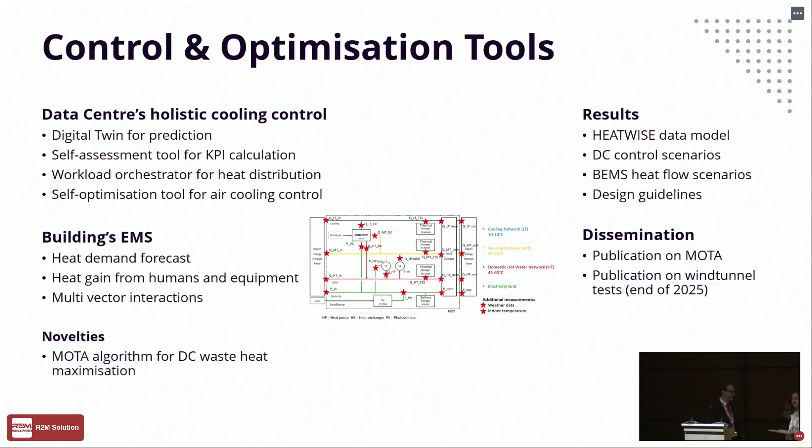Thank you so much. It's really interesting to see how many of these projects are actually connected and recall each other. So let's move on to the last presenter for today, Attila Moritz.

Please, the floor is yours. Hi, hello. Oh, sorry. No. I'm now cooked, so this is not, yeah, please. I got confused. Robert Birke, exactly. I was not matching the faces. So please, the floor is yours. No problem. Okay. Hi, thank you.

So I'm Robert Birke from the University of Turin, and I'm here to present the project Dyman. Dyman is kind of a sister project to the first project which has been presented, so there are some things you should already be familiar with. Basically, Dyman is dynamically managed self-cooling HPC data centers.

We started with 10 partners a bit more than 1 year ago, and then we had a successful hop-on, so now we are actually 11 partners distributed into 5 countries.

So what is Dyman about? The goal—we have three goals. The first one is to develop further, basically to develop two cooling prototypes.

The first one we have already seen a little bit in the previous presentations is about adsorption cooling. Here we really try to improve the technology. The second one is to do two-phase cooling. The main thing is to actually combine these two cooling technologies to cool the data center better.

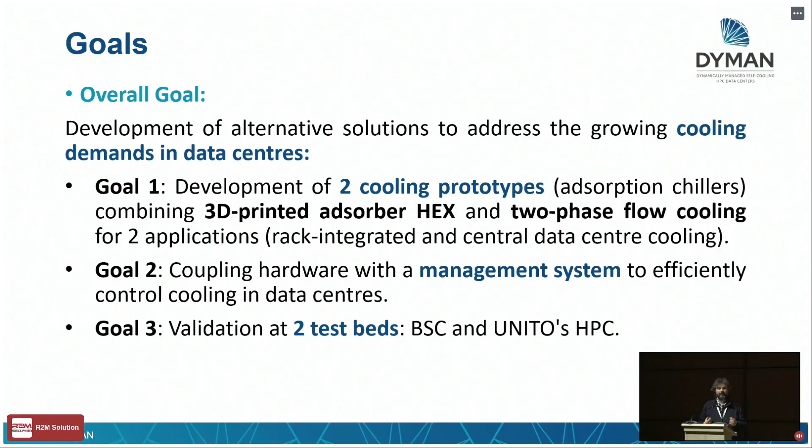So let's go a little bit more into detail. The first core concept is that we want to design new adsorption chillers. Here the main two challenges are: the first one is to find better materials so that we can lower the temperature at which this adsorption chiller works.

And the other one is to design better heat exchangers to make the heat exchange more efficient. We do this with 3D printed structures, as we will see later on.

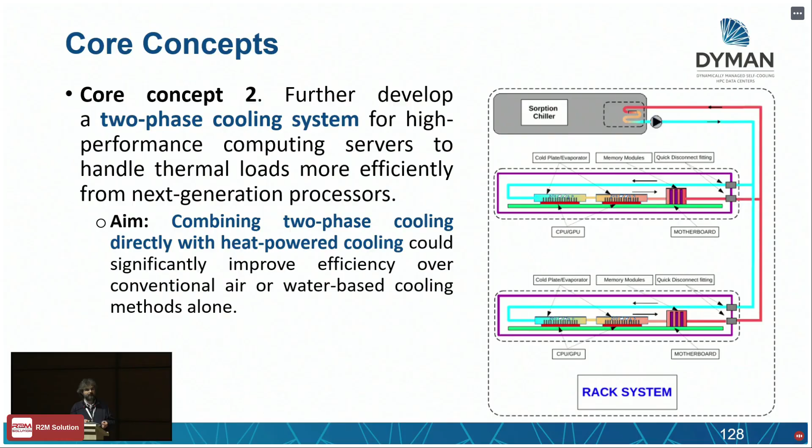The second core concept is this two-phase cooling, where we really want to integrate the two cooling technologies. Here, the main challenge is to make the temperatures at which these systems operate compatible between them. I'm not going too much into detail on the two-phase cooling system, since there was already the presentation by In Quattro on this, which went into great detail.

So just a short presentation of the test beds. We actually have two, as mentioned before. The key point of having these two is the scale. We have a small data center hosted by us, designed for 250 kilowatts.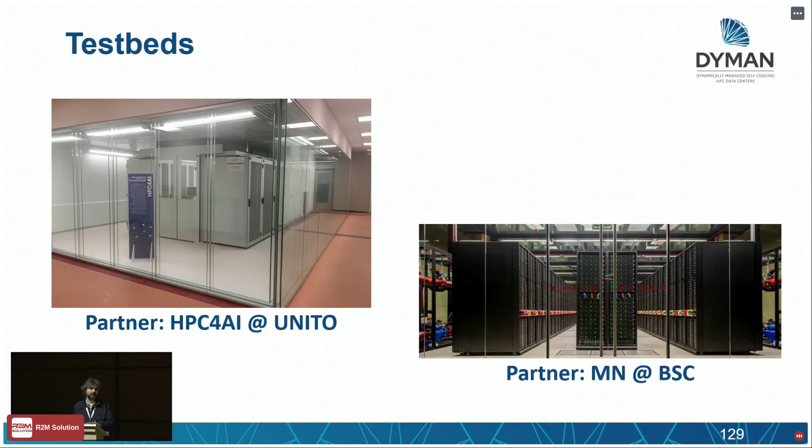And then we have a large multi-megawatt data center, or better, a supercomputer, which is the Mare Nostrum at the Barcelona Supercomputing Center. So the real difference between applying these technologies at these two test beds is that they are really different in terms of scale, which also means different technologies are employed—for example, the first one is air-based, the second one is liquid cooling based. So we have to integrate these new cooling technologies with the existing cooling to bring out the heat at some point from the building.

The challenges we are trying to address: first, we want to reduce costs by reducing the power and energy consumed by cooling. This isn't just nice for the environment, but also nice for your wallet—the less energy we consume, the less we have to pay. This is done to increase operational efficiency, and naturally we want to do this by avoiding any harmful refrigerants.

There's a lot of material science in this project, both at the level of two-phase cooling and at the level of adsorption cooling.

The pillars on which the Dyman project is built are that we develop the cooling system, then we integrate this cooling system with management software, and we actually validate it.

In parallel, we are also participating in EIC portfolio activities, which all the projects funded in this Pathfinder call are part of. So we are also collaborating with other projects to see how we can pinpoint ideas.

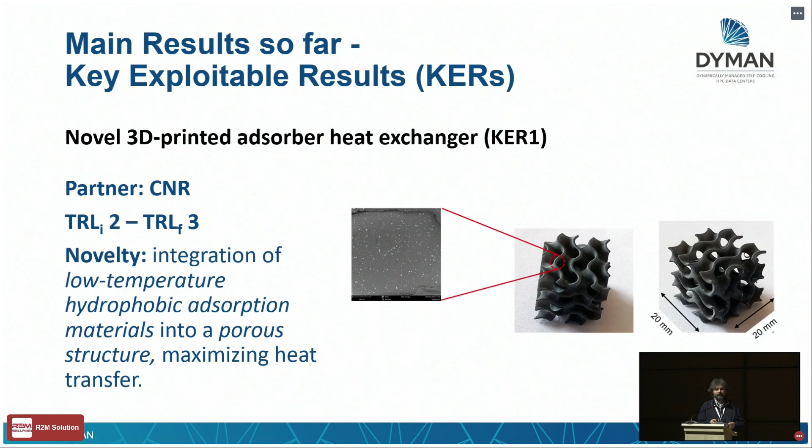Then we have this new adsorber, which is an improved version so that we can actually improve the heat transfer.

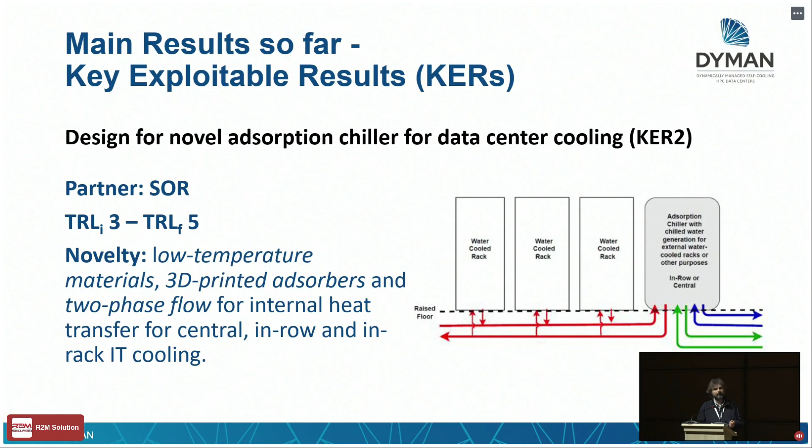We also have this integrated design between the lower temperature stage, to recycle the energy and heat extracted by the two-phase cooling and transform it into cool air or cool liquid. With this, similar to the Hycool project, we can either cool the room itself, or cool other components which are less demanding or have lower heat densities.

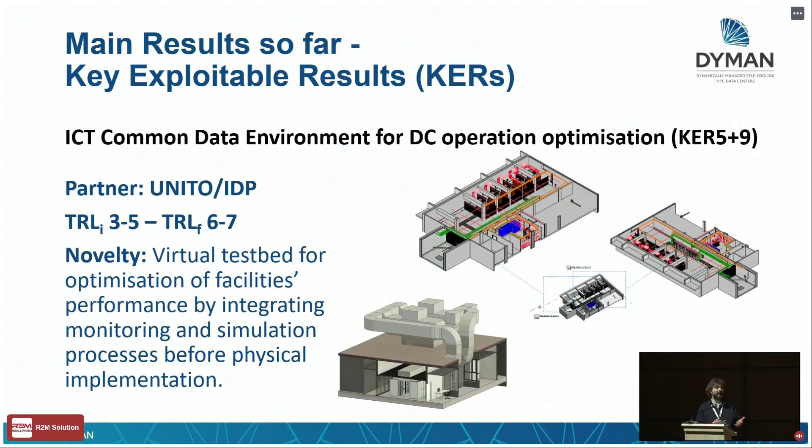As my previous speaker said, if you want to invest, you want to play around and simulate how much you can gain. So we are also working on creating digital twins of these two data centers, so that we can test design decisions before they are actually implemented.

This is ongoing. And we have this management software which can talk directly with the workload manager and directly with the energy control systems, which nowadays are inside all the servers, to modulate energy consumption based on workload requirements. It has now been extended with an interface to talk with the cooling systems in a data center. As of now there's no new control yet, but we've put in place the fact that the two can communicate.

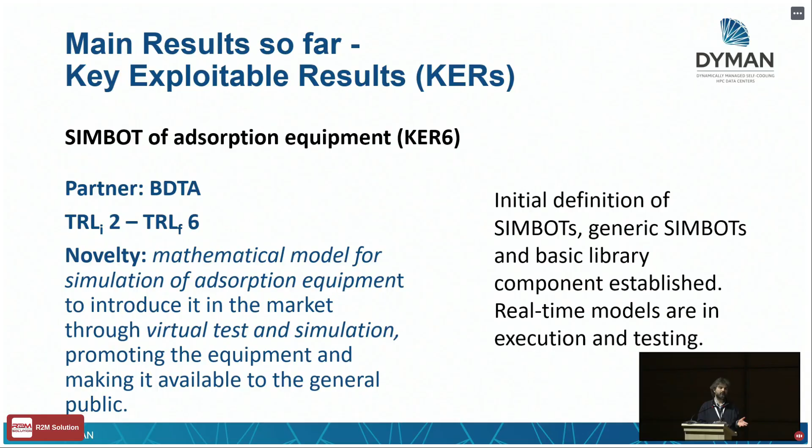As a last key exploitable result, we have the SIMBOTs, small mathematical models which can model the behavior of specific parts of the data center. We want to couple these with our digital twins to make more precise predictions.

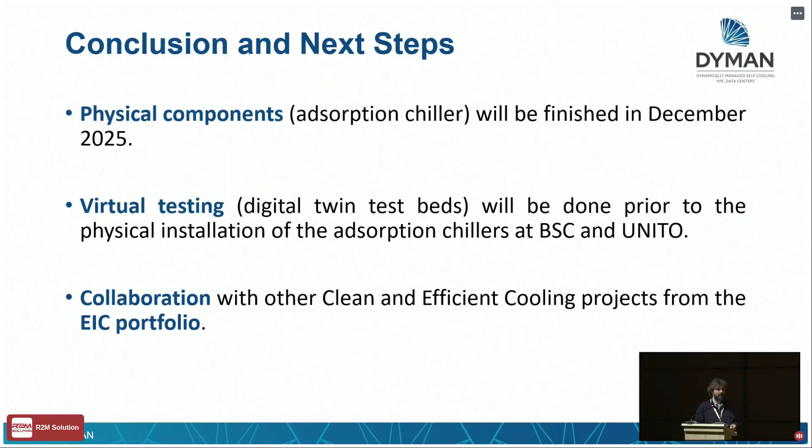As of now, most of the physical components have been almost completed; we plan to finish them by the end of the year. In parallel, we are doing virtual testing of these components. The last part of the project will be about validating these technologies in the real world, by deploying them in the two test beds, and we will continue our collaboration with the clean and efficient cooling projects from the EIC portfolio. Thank you.

Thank you so much, Robert, and thanks to all of you for showing us these applications that are not only about research, but really show how some research is generating innovations that can soon be taken into the market and applied in real life.

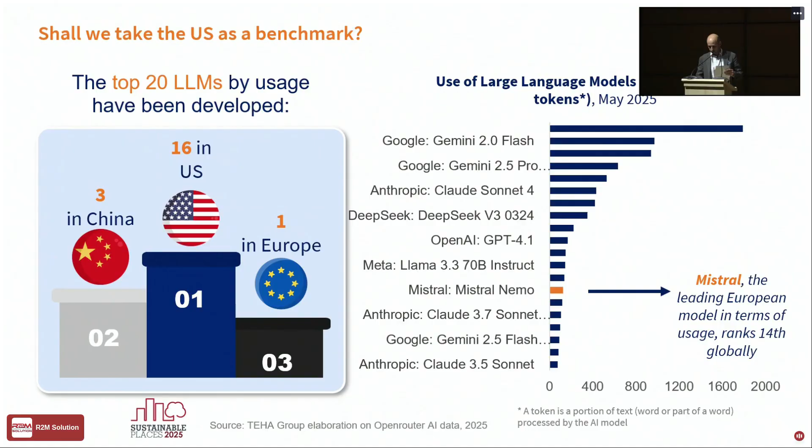The second question is whether we will see development of further regions in Italy, or a more spread-out development of data center infrastructure across the country.

Regarding Italy, we see some development in the Latium area, around Rome. But for other parts of Italy, it's probably something still to come. We may see an upside in coming years presented by the application of security directives.

In particular, the NIS2 directive. We need to take into account that currently in Italy, something ranging between 50 and 70%, depending on the sector, is still on-premises.

So there will probably be a need to develop a new hybrid infrastructure taking into account both on-premises and centralized infrastructure, with edge data centers rising in importance, though this is still something to be demonstrated. Sometimes in Italy we hear about the potential role of Southern Italy to develop a second region.

This is something that needs to be demonstrated; I have no evidence of such development currently. Another potential upside is the different kinds of artificial intelligence being developed, especially agentic artificial intelligence.

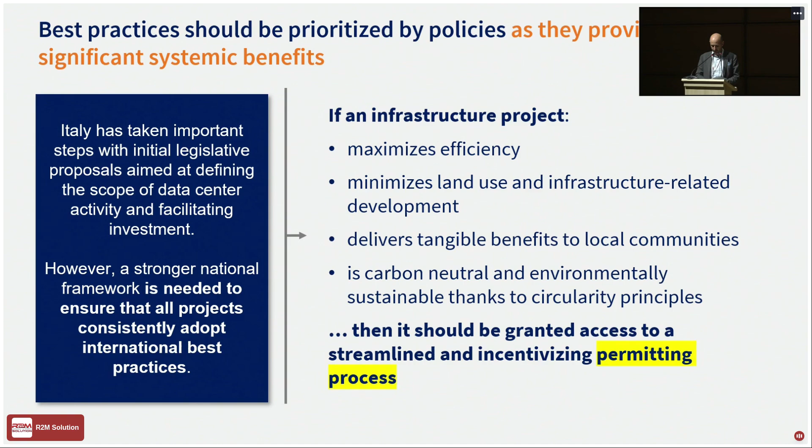Of course, this is a matter of building knowledge between the policymaker and the people within public administration who are invited to evaluate different processes. I just mentioned energy.

I'm sure it's the most important issue concerning data centers. I also asked before why Italy arrived so late with data center development, and I'll provide you a few hints.

We've spoken about how to decrease the PUE - 1.5, 1.2, 1.05. But the real matter now for whoever is entitled to develop new data centers is how to feed, not how to cool - it's how to feed the data center with the required energy.

This is an analysis we've run regarding time to power in different countries of Europe. As you can see, countries like Ireland, UK, and part of Germany are currently, let's say, out of the game. France, Spain, and the rest of Germany have some criticalities. Now it's the moment for Italy and the Nordics, because we can grant a lower time to power. But my question is, how long will this last?

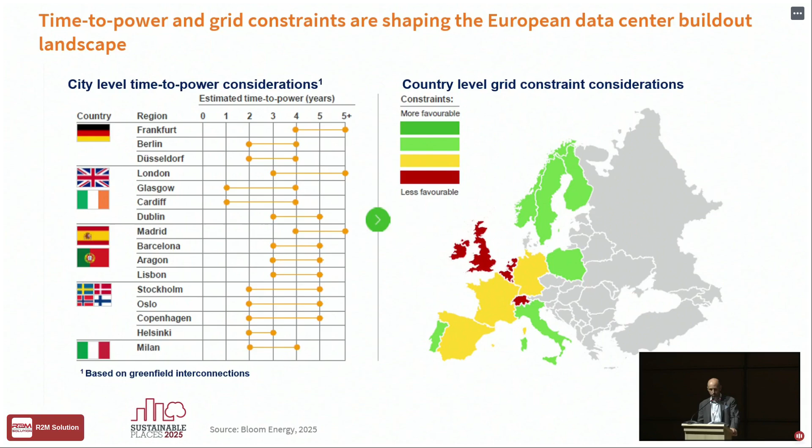Currently we are leveraging old power lines dedicated to former industrial sites, and this will probably be used for only a few more years. We need to start thinking about what comes later to allow the capacity to invest in Italy. We're used to hearing from data center developers 'follow the cable,' follow the data connection, but now the mantra is 'follow the power.' The main issue for data center developers is to have a safe, reliable, and timely energy connection.

What I can say for sure is that the current model is probably the most difficult to pursue in the future. The current model is 100% network electricity, continuous availability with 24/7 renewable energy, diesel backup. Wide evidence of why this is so difficult is in the newspapers - every day you can see in the Financial Times problems in developing data centers in different parts of Europe.

That's why, together with our partners, we are developing a new concept we call a data and energy hub - integrating different energy technologies within the perimeter of a data center, in collaboration with different entities, able to transform the data center from being an obstacle or problem for the network into being a grid asset, able to provide capacity and maybe ancillary services to the external network.

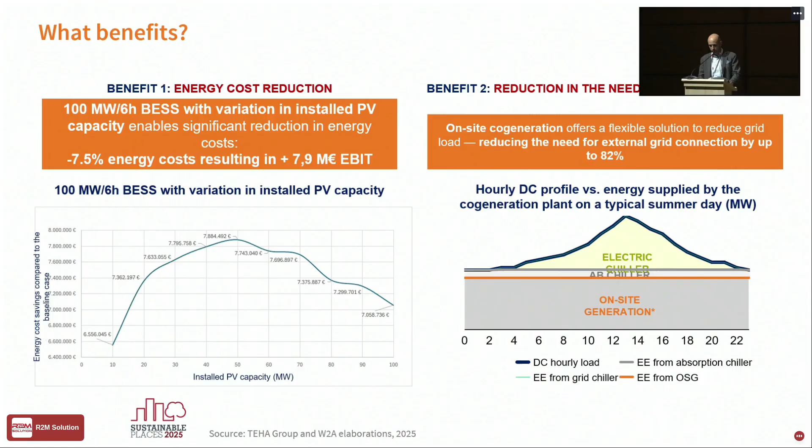We are currently running some simulation. I'll provide you a few hints regarding some of the benefits. The first one is reduction of the cost of energy. For a 100 megawatt data center, we calculate a minus 7.5% of energy cost and plus 7.9 million euro EBIT, just by integrating some batteries. When it comes to the capacity to integrate on-site generation, we calculate minus 82% in connection required - that means less time waiting for Terna to provide the connection. So I would like to conclude with a topic regarding where we are in terms of maturity of our value chain.

How much are we able to capture value from this development currently in Italy? The answer is that our capacity is quite poor, because our value chain in Italy, and especially in Europe, is not prepared to face this increase of potential demand. Here is our model of the value chain. As you can see, it's really simple. But to develop a data center, we need the capital, we need the developers, we need the real estate - and as we will see, these are completely out of the game. We need data center operators, and then we need data center users, the ones that provide digital services on the market. We see 5 main criticalities.

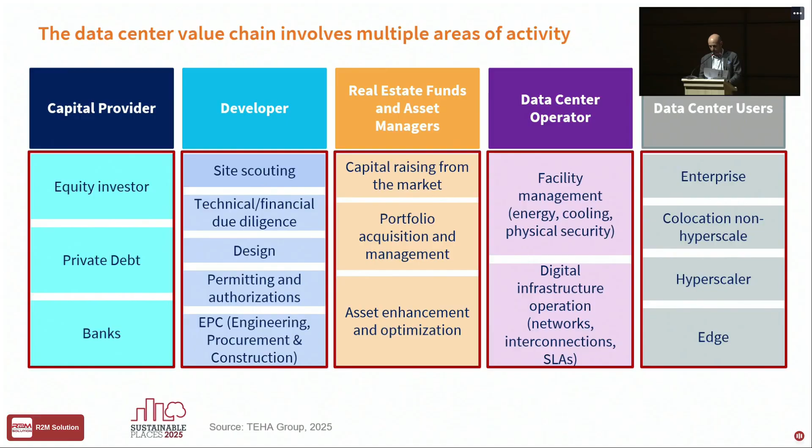The first one relates to the complete absence of dedicated finance for data centers in Europe, and the complete absence of a proactive role of real estate within the European data center environment. This is quite completely different from what is going on in the US, or in the UK, where data centers are among the first investment choices for real estate. What we see now in Europe is that data centers are not among the priorities for investment.

We are just above self-storage investment, so very few, very low interest from investors. Why? Mainly because we have an environment that is not proactively evolving in order to allow investment and provide certainty to the investor. We have a regulation that is too fragmented. We have very low understanding of the demand. As we see in the US, it is driven by the development of large language models. In Europe, we don't have this kind of rising demand. There is a lack of liquidity and transparency regarding this.

Most of the data centers have been developed by hyperscalers. We have no more liquid demand for different kinds of infrastructure. We have the problem of energy, we have the problem also of local context. The second criticality is the lack of intersection between the demand and the providers of services. The one on the right doesn't know what the one on the left can provide them, and the one on the left doesn't know what is required by the one on the right. So real estate and capital providers have no clue on how to make money on the data center market, at least in Europe.

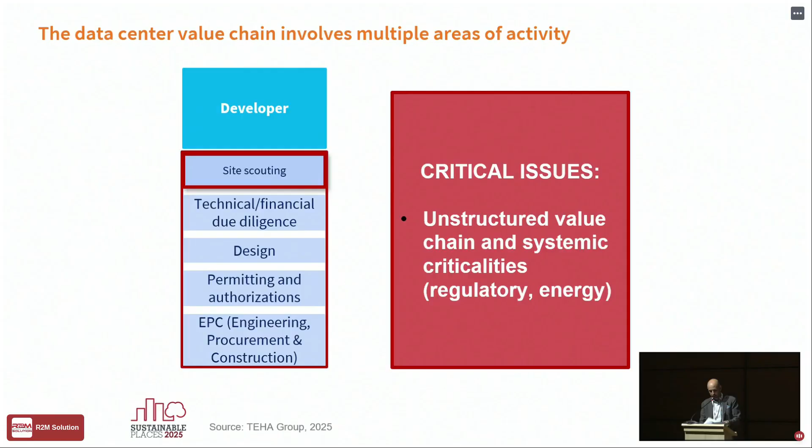The third criticality is developing - I call this the Far West. Since I started the community with Microsoft, AWS, and other partners, I receive at least 10 proposals for sites a week on LinkedIn, but none of these sites are suitable for data centers, because they come from developers used to working in renewable energy, and the process to qualify sites for data centers is completely different. We need to develop a site qualification process that is more suitable to provide de-risking to the developers. I'll jump past some evidence to arrive at the conclusion.

The last criticality is talent. Hopefully, there are several universities now working to promote the technical people who are able to work on data centers, but we also need to look at the people who are able to work, let's say, blue collar, on the plants related to the data center. I'll conclude by calling you to have a look at our website and the activities we are currently running in the data center community of Ambrosetti. Thank you.

Great, thank you so much for these provocative final remarks. So we went from the macro level at the beginning of this afternoon to explore the micro level of all these systems that are hosted within data centers and allow their functioning, and then we zoomed out again to this macro level to consider all the systems that actually are outside of data centers and that enable their development.